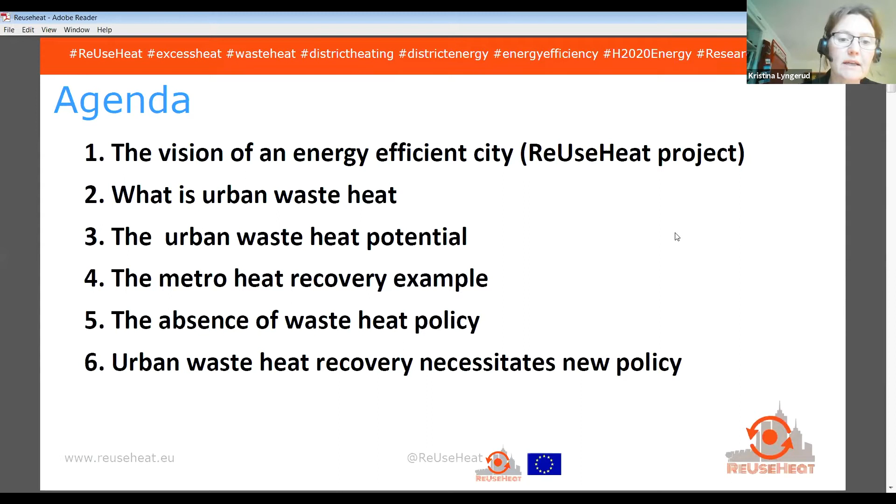The agenda is that we first will talk a little bit about the vision of an energy efficient city, at least from the perspective of ReUseHeat. We will shortly address what we mean with the urban waste heat. We have computed what the potential should be in Europe, and we also know how much available heat there is in the metro systems in EU 28. Then we go into our metro heat recovery example and our experiences. And then we will conclude with some learnings we have on the policy aspects.

First, we have a vision in ReUseHeat, and it is that in the future, a smart city will be able to harvest the energy that it generates itself just by people living in it and moving around in it. So every day when you go to work, maybe you use the metro, a lot of energy. You use the bathroom, a lot of sewage. You need to go to the hospital or other service buildings, a lot of energy. And to do all of this in a smart way, we need computer power and data centers. And these are our demo sites. We have these 4 demo sites in the project.

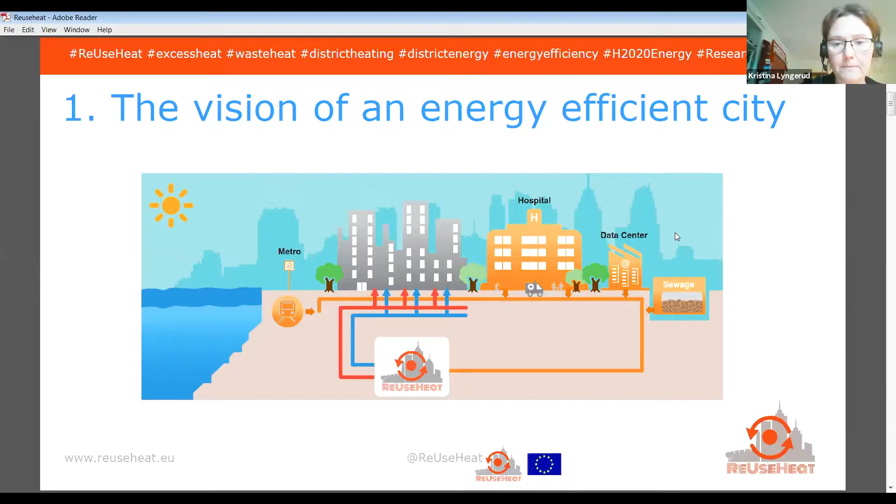And how does urban waste heat recovery work? I guess all of you are engineers and you already know that, but maybe for people like me who are economists, this is interesting information. The most efficient way to use this kind of low temperature heat recovery is, of course, a new building with low energy demand, but you can also recover this kind of heat into existing district heating networks through some kind of island network with switches or heat pumps. And what we do in our demonstrators, we have heat pumps in different constellations, boosting the temperature to the desired levels of existing district heating networks. This is what we demonstrate.

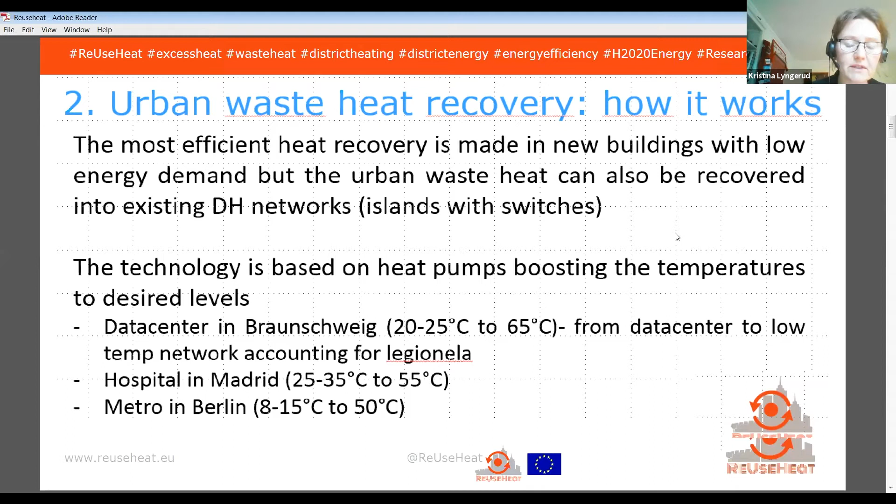We have a data center in Germany, in Braunschweig, where we heat up around 20 to 25 degree heat streams up to 65 degrees. And then we have the hospital in Madrid. Here we recover waste heat from the cooling towers with about 25 to 35 degrees, and we boost it up to 55 degrees. And then we have recovery from the metro in Berlin with very low temperatures, for example, compared to London that you heard about. We will recover 8 to 15 degrees, and we will increase it to about 50 degrees and use it in a low temperature system.

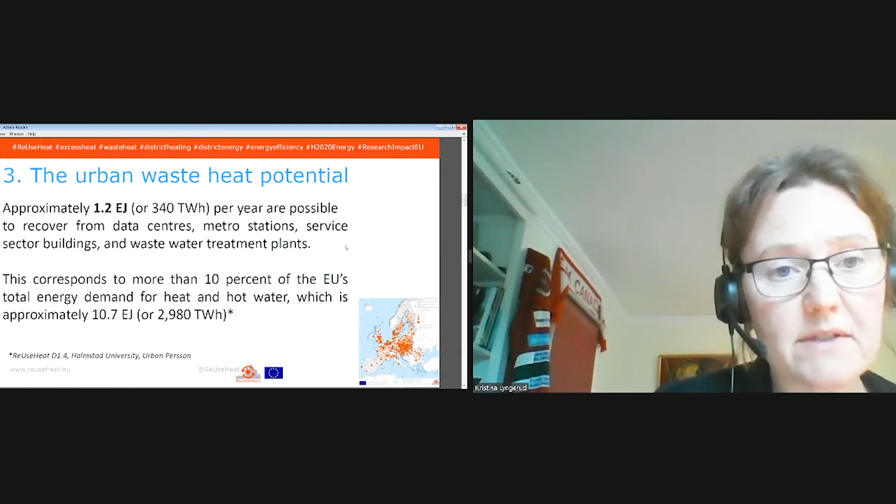So what we did early on in the project was to quantify how much urban waste heat we have in Europe. And based on those 4 sources that I have mentioned here that we have our demonstrators on, we find that there is 1.2 exajoules per year that you could recover. This is a lot of energy and corresponds to more than 10% of the EU's total energy demand for heat and hot water. And as you can see in the little map, we have it all across Europe.

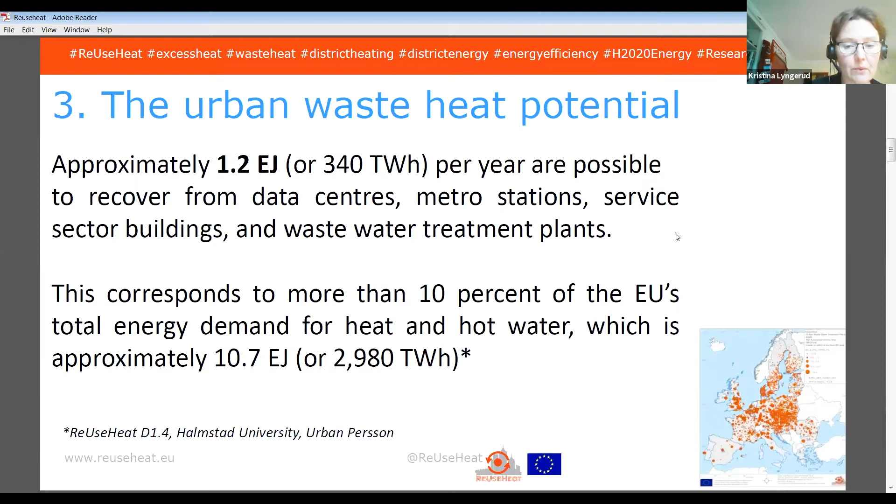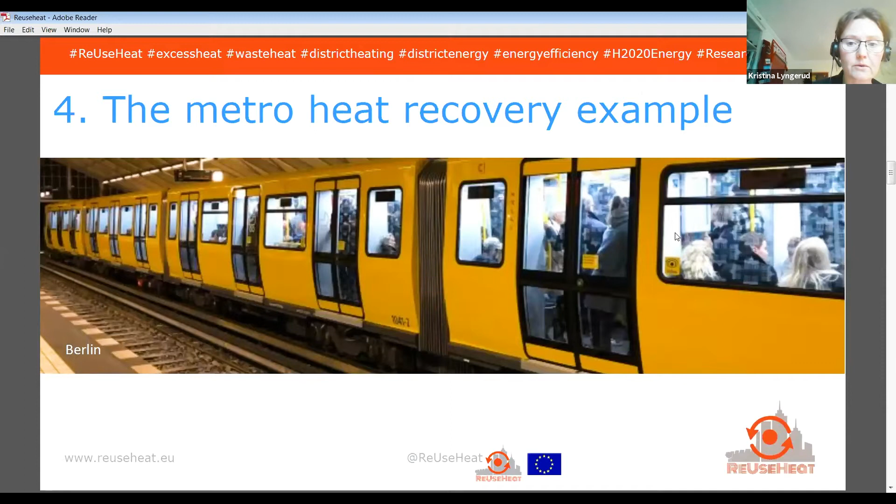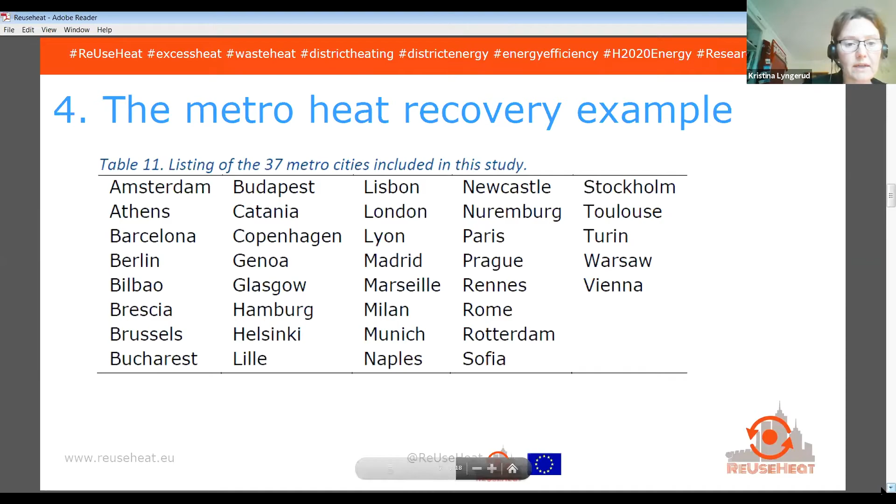Then, if we go into the metro heat recovery example, this is what the subway in Berlin looks like. And we did an analysis when we did these potential studies. We looked at 37 metro cities in Europe, and they were included to find the potential also of the metro volumes of heat. One finding that we had is that the seasonality is pronounced and we have most waste heat in summer. And here you can see how much would come from different systems.

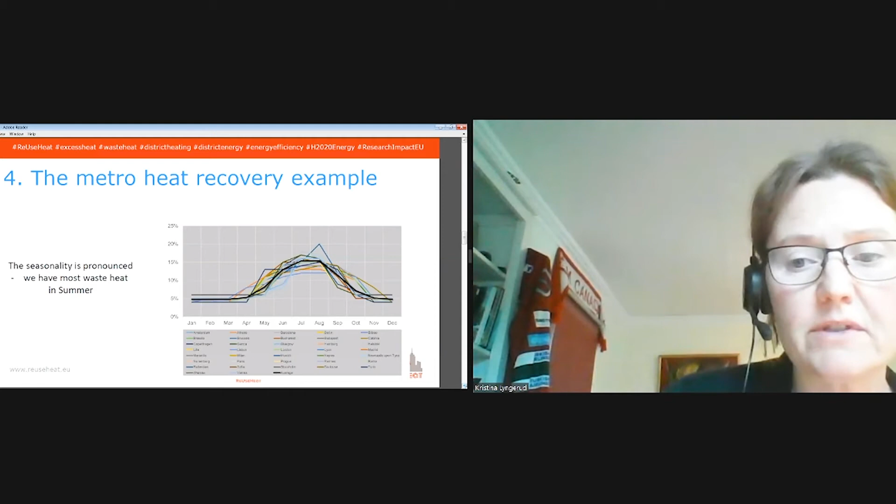If we go to our ReUseHeat metro example, we have the example in Berlin. First, we were going to do it in Bucharest, but as a result of many technical problems and a lot of permission difficulties, because in Bucharest, the permission to get waste heat recovery from the tunnel was at the same level of getting permissions to make new electrical cabling, big cables, commissioning of that. So it was really proving to be an impossible quest. So we had to shift our demo site and we shifted it to Berlin.

In Berlin, there is a metro with 146 kilometers of double tracks, 144 stations and 10 lines. And the average distance between 2 stations is 0.8 kilometers. What we will do in our demo is to recover air from the metro tunnel into a local low temperature district heating network. So this is different from the Islington case where there was recovery from the ventilation shaft. Here we take it from the tunnel.

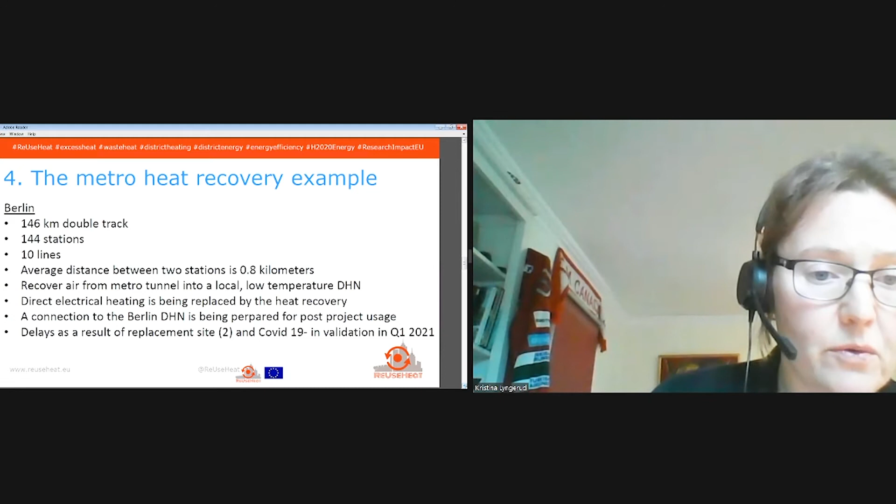And as a result of course of COVID and these replacement of sites, we are a little bit in delay. We were originally going to be online now in October of 2020, but we are foreseeing to go into validation in March next year.

So what have we learned to date? We have learned that tunnels are tricky because you need permits for working in the tunnels and you need access to the tunnel and there is a lot of safety staff. So this means that when we will do our implementation, we can only do it in nighttime between 1 and 3, because this is when the Berlin metro is not operating. So it will be night shifts and we will have to have a lot of safety staff with us. So that's a circumstance making it a little bit hindersome.

And then we also discovered that for heat pumps to work well, there is a difficulty in tunnels because there is a lot of metal dust from all of the trains braking and accelerating in the tunnels. So we have to make sure that the heat pump is designed in a special way.

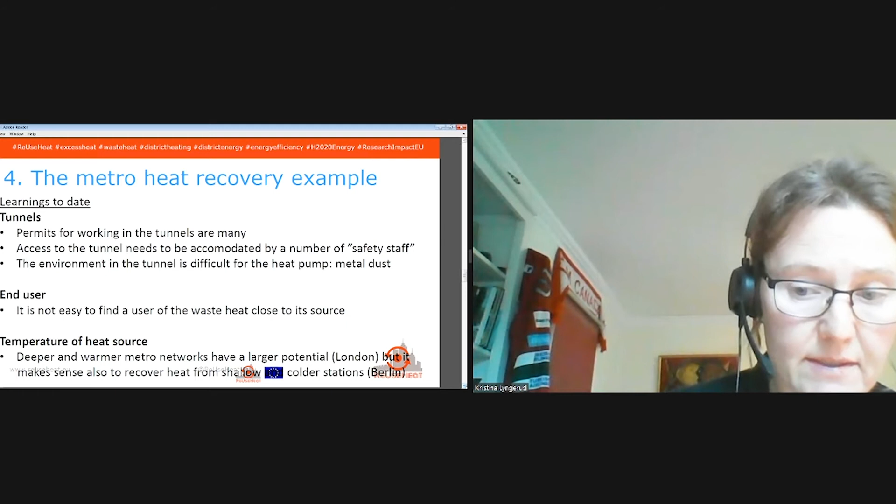We also found that it's not always easy to find an end user of the waste heat that is close to the tunnel. In the first example in Bucharest, we identified a hotel and we identified this big supermarket. And then in Berlin, we were first pursuing to go with the technical university, but then we found this district with a low temperature system. So one search that was very long and difficult was to actually find who wants to use this heat.

And then we also see that in Berlin, if we can make it there, we can make it anywhere, because a deeper and warmer metro network will make the efficiency, the COP of the heat pump much better. But what we try to do here is to show that it makes sense to recover heat in the metro system. And our station in Berlin, it's also pretty shallow.

So if we would have had a situation lower below ground, we would have had higher temperatures. But we want to show if we can do it there, you could do it anywhere. No excuses.

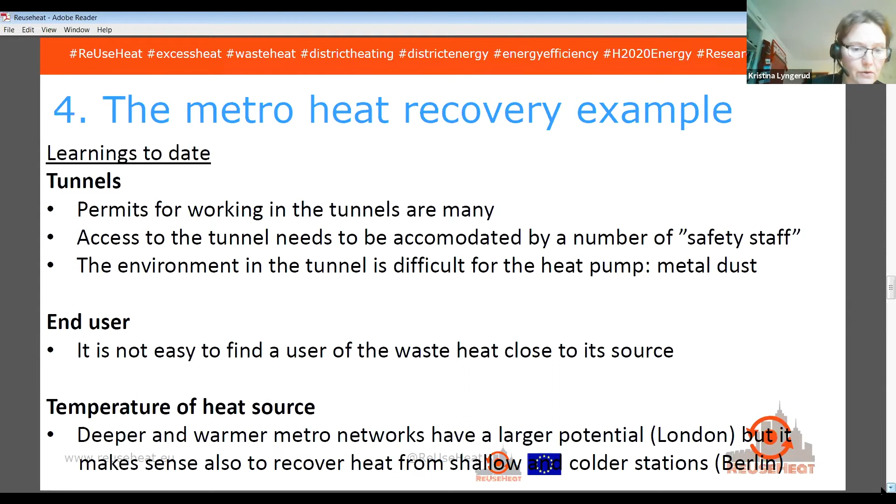Yeah, and then what is the output going to be in terms of the 2050 goal achievement? So what we do is to recover energy that would otherwise have been completely lost. So it's a green solution, and we increase the energy efficiency of the building, replacing then the electrical heating.

And another big important thing is to make the owner of the waste heat, the metro operator, the Berliner Verkehrsbetriebe, aware that they have so much heat that they could do something with. And already now discussing with them, they have identified that if it works in this location, they have at least 10 identical locations in the network, and they have hundreds of similar locations across their network.

So once you get the metro operator interested and we can show that it's working, then I think that will be very important for crossing the barriers.

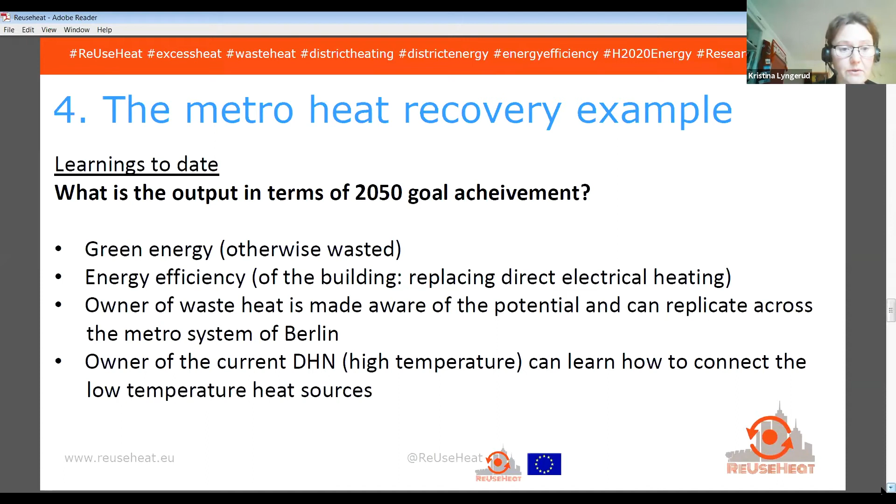Yeah, and here we also have made it in such a way that we have the big and hot district heating network being connected to our heat source to make also the conventional district heating operator aware of the low temperature solution and gaining knowledge on how to actually interact with the low temperature heat source. Yes, so that is what we do in terms of metro heat recovery.

And the ReUseHeat project, it's also framing a lot of questions that have previously been forgotten. We are like the baby brother of the project Celsius. We talk with Celsius a lot, we feed input to Celsius. And when we wrote this proposal for this project, the Celsius people told us that they could have put more emphasis on identifying contracts and business models and risk analysis and bankability studies. So this is something that we have engaged in.

And doing so, we have identified a lot of things also on policy. So we made an article, it has been published, where we made a review of existing policy framework on the EU level. And when you look at them, there is really a number of them addressing energy, but none of them is explicitly talking about waste heat.

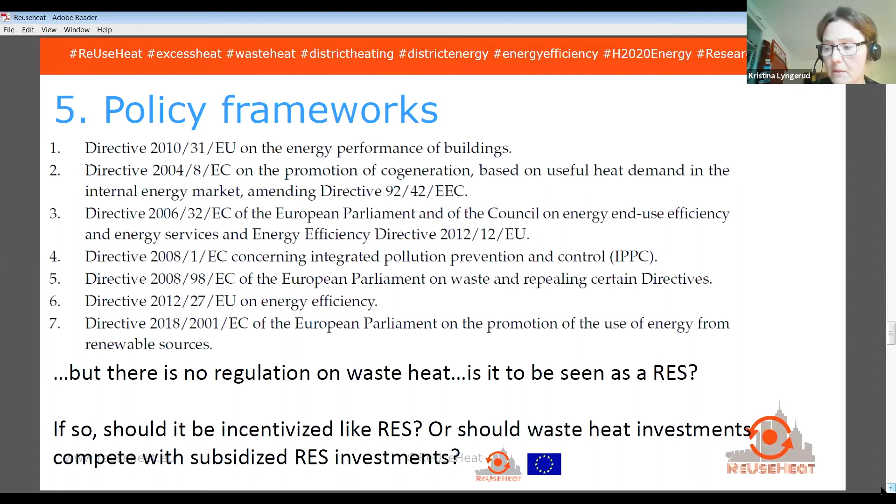So there is a big discussion across Europe that you are all aware of. What is waste heat? Is it to be seen as a RES, or should we have some kind of other perspective and measurement of it? So there is a big question mark how to assess the waste heat.

And when you go to policy frameworks on a national level, looking at district heating, we made a study of 5 countries, and we find that only in Germany and Denmark there is explicit regulation linking to the low temperature district heating. And we don't find anything on the waste heat recovery side. So we conclude that our kind of solution is not really supported by current policy.

Okay, so once that has been identified, it's relevant to discuss what is then needed. So we have concluded that our demo sites do not contain a lot of new technology. I mean, heat pumps have been there for a long time, and also district heating networks. But what is new is the kind of system that we built, because the system goes over the old, what is called, boundary conditions.

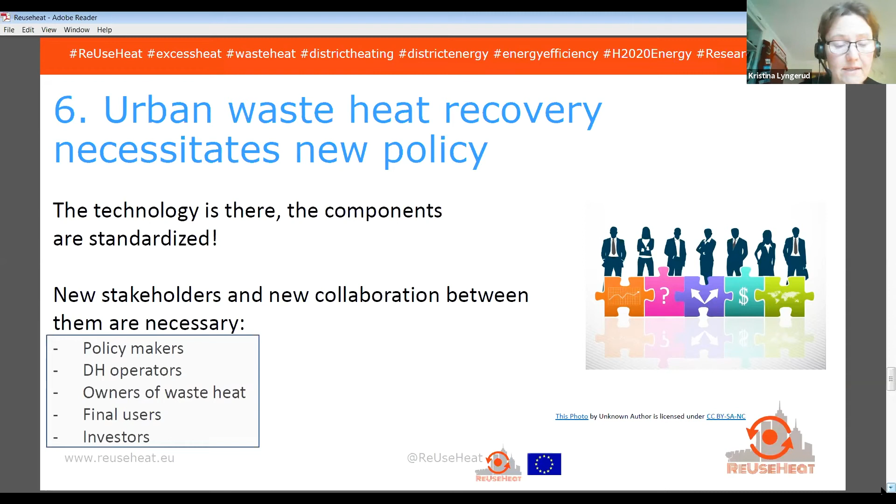So all of a sudden, new stakeholders have to interact with each other. And we have identified that we have 5 key stakeholders for this kind of recovery. It's the policymaker, the district heating operator, the owner of waste heat, the final users, and investors. And the real challenge is to facilitate for them to start interacting in new ways. And this is where policy becomes very important.

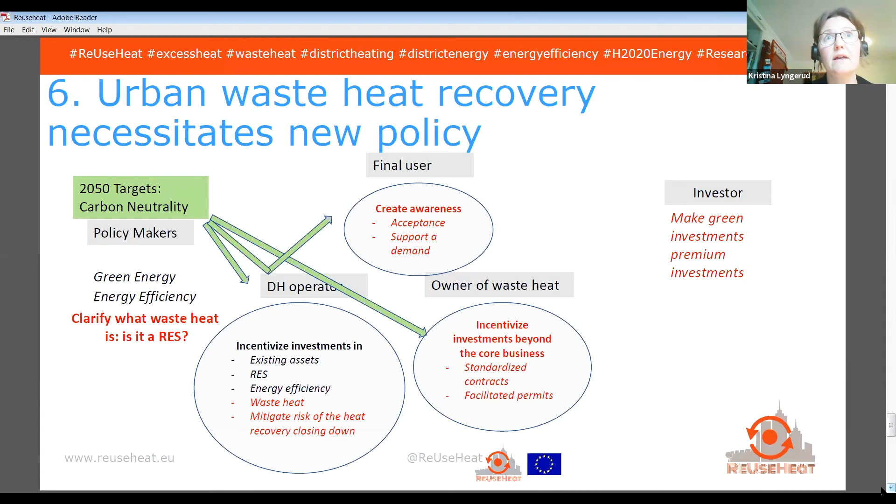And then for the investor, we must make sure that green investments become premium investments for them, that it becomes interesting. So that means that maybe for those who are interested in green bonds, they need to understand what kind of investment in the portfolio is really green. And once we have those measurements in place, so the investor can easily find the green investment, well then it's easy to incentivize that kind of investment. Yeah, and that was really it.